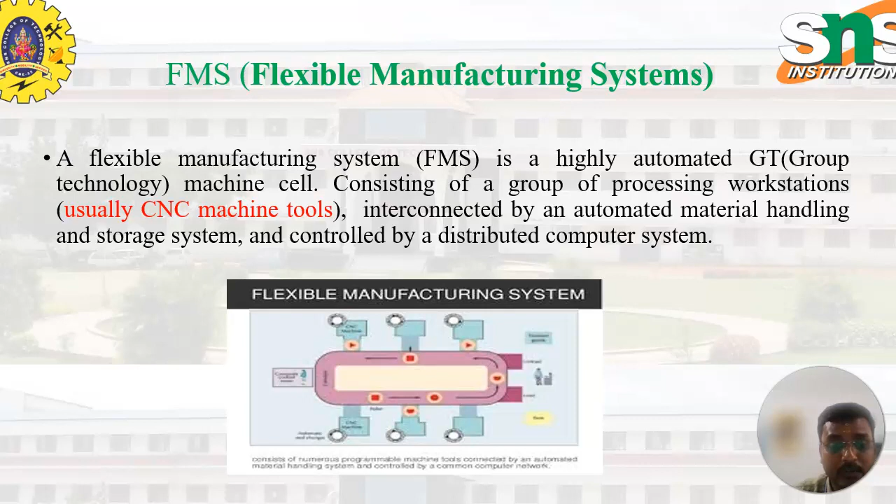Group technology is nothing but the grouping of similar parts or machining operations together to make the product. So here we have many types of advantages and many types of layouts. Some of the flexibilities in manufacturing are machine flexibility, production flexibility, mixing flexibility and product flexibility.

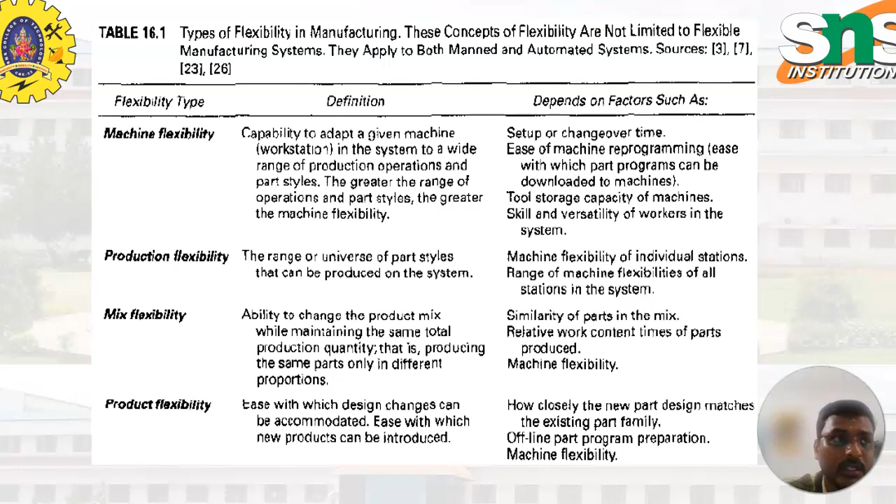Machine flexibility is the capability to adapt a given machine workstation in the system to a wide range of production operations. So we can connect n number of machines in a single layout, and we can give the component to work in that particular machine. Production flexibility is the range or universe of part styles that can be produced on the system. They can do one operation and directly move to the next operation, then mixed flexibility. These are some of the advantages.

Then routing flexibility, the capacity to produce parts through alternative workstation sequences in response to equipment breakdowns and tool failures. If any machine breaks down or a tool fails, we can directly move that work part to another machine to complete that process. Volume flexibility is the ability to economically produce parts in high and low total quantities of production given the fixed investment in the system. Expansion flexibility is the ease with which the system can be expanded to increase the total production quantities.

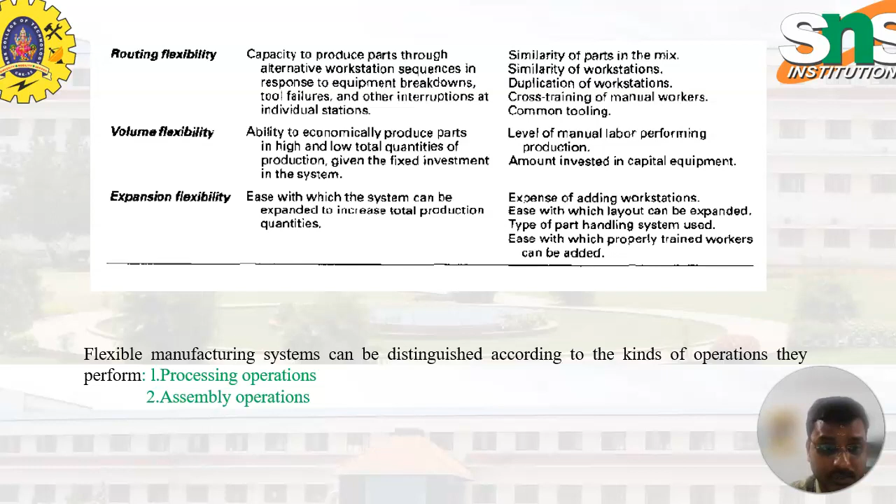FMS can be in two kinds of operations: processing operations and assembly operations. Processing operations transform the work material from one state to another, moving towards the final desired part or product. It adds value by changing the geometry, properties or appearance of the starting materials. Processing means the main operations that give the shapes or properties to the materials.

Assembly operations come after the processing operations; after completing the product, we make an assembly. It involves joining two or more components to create a new entity, which is called an assembly or subassembly. Permanent joining processes include welding, brazing, soldering, adhesive bonding, rivets, press fitting, and expansion fits. These two are the main types in FMS. The processing operations and assembly operations help to make the product easily and with quality.

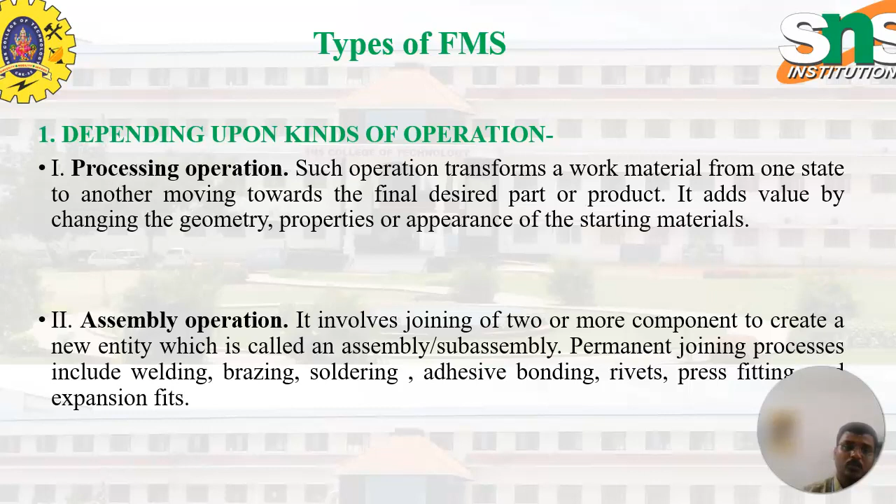These are the types of FMS. Depending upon the number of machines, we have three types: the single machine cell, SMC, the flexible manufacturing cell, FMC, and FMS. A single machine cell consists of a fully automated machine capable of unattended operation for a time period longer than one machine cycle. It is capable of processing different part styles. The FMC consists of two or three processing workstations and a part handling system, so it is like a layout where processing is done continually.

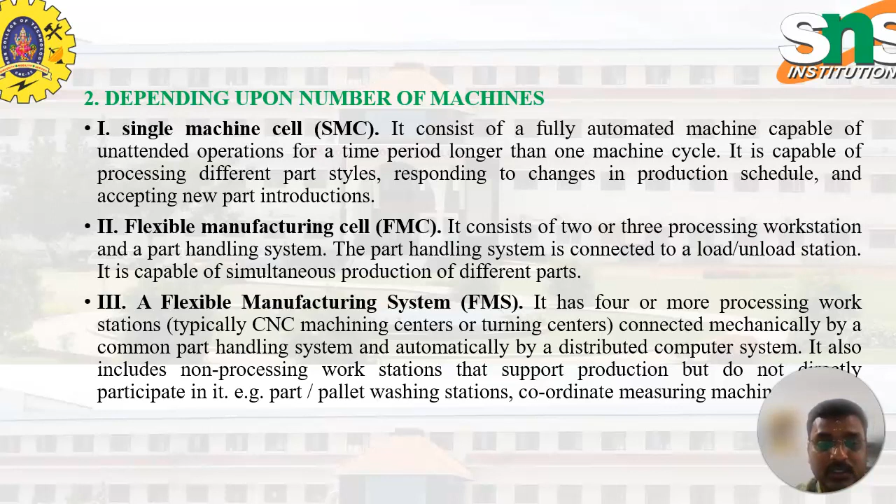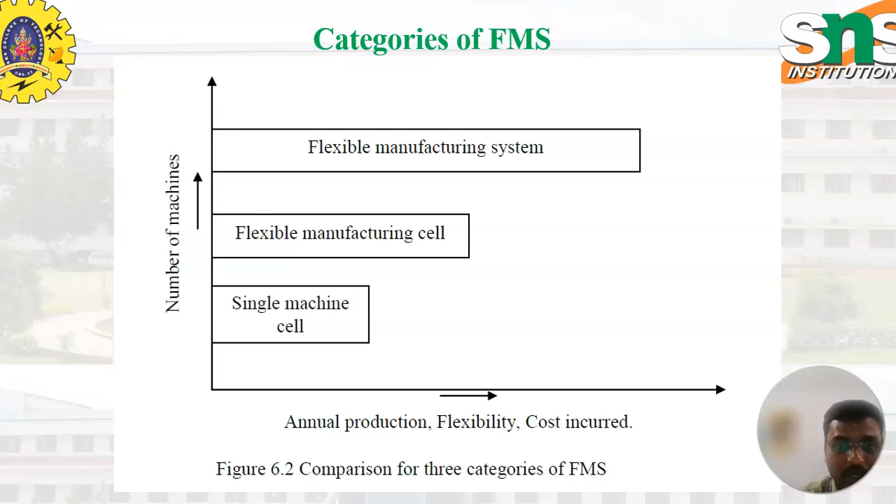FMS has four or more processing workstations. It is interconnected with CNC machining centers and turning centers to complete the process. These are the categories of FMS: single machine cell, flexible manufacturing cell, and FMS. Depending upon the level of flexibility, we have two types: dedicated FMS and random order FMS.

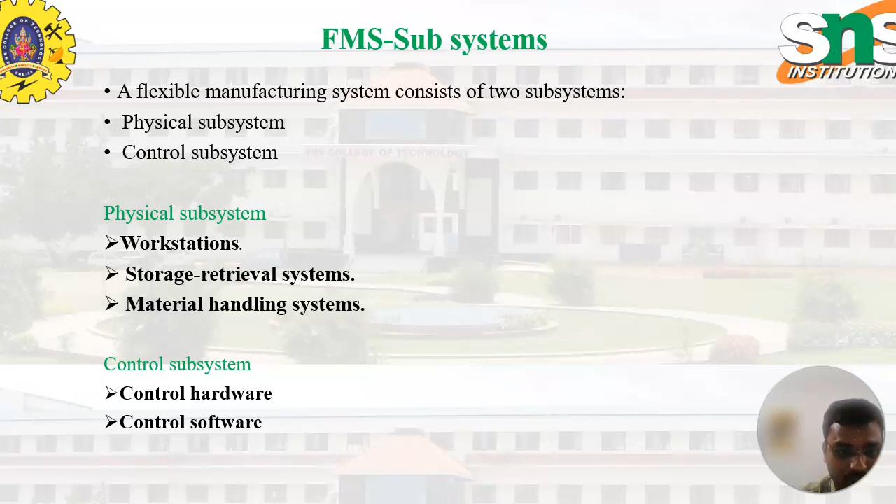The flexible manufacturing system has two subsystems: the physical subsystem and the control subsystem. The physical subsystem is the workstations, storage and retrieval system, and material handling system. The control subsystem is the control hardware and software. This is the flexible manufacturing system introduction.